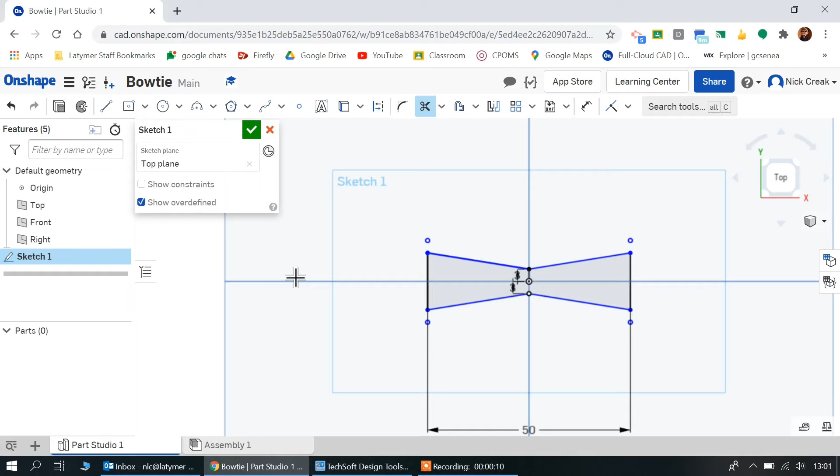When you're drawing on Onshape for a laser cut part, you want to draw in one sketch only and in 2 dimensions only. You then tick your sketch once you're finished, so you can see, for example here, I've got a bow tie.

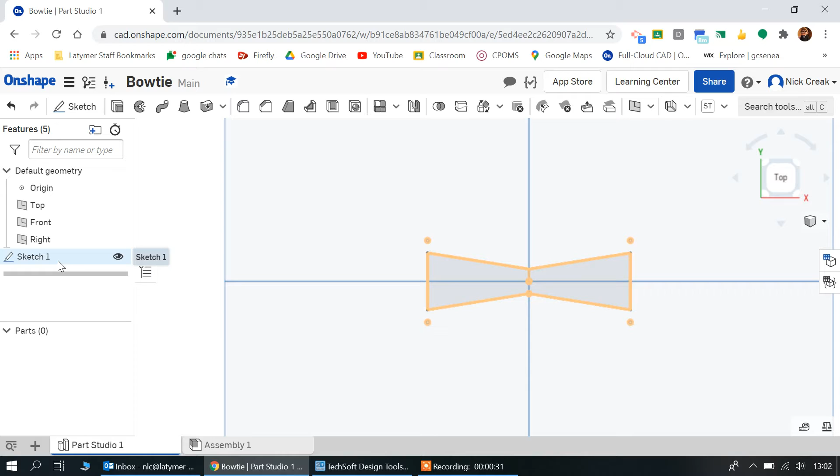I'm happy with it. I'm going to right click on Sketch 1, go export as DXF or DWG. You will most likely have DWG automatically selected if you haven't done this before, so make sure you have DXF. You change the name here to your initials or what you want to call it, as long as it's recognizable, and make sure this box here is clicked, then click export.

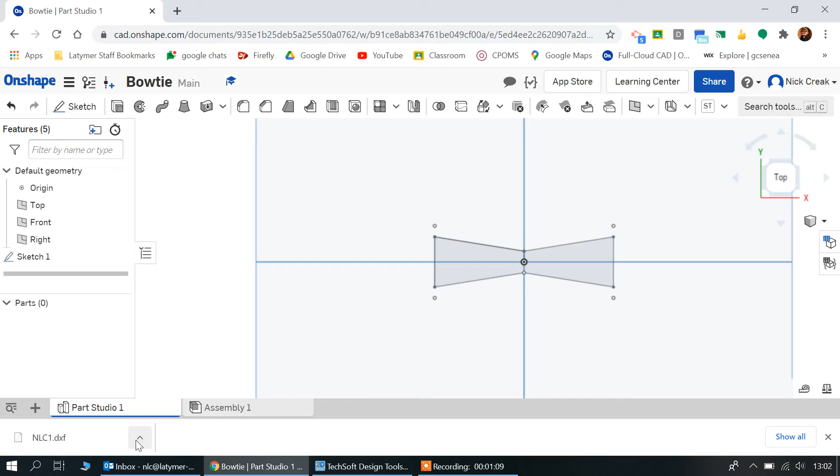Now from here, because of the permissions that you have on the computer, you need to click show in folder. I'm just going to quickly search for NLC1, and there's my part there. What you're going to do is drag that into a folder that you have access to. For example, I've got pictures here.

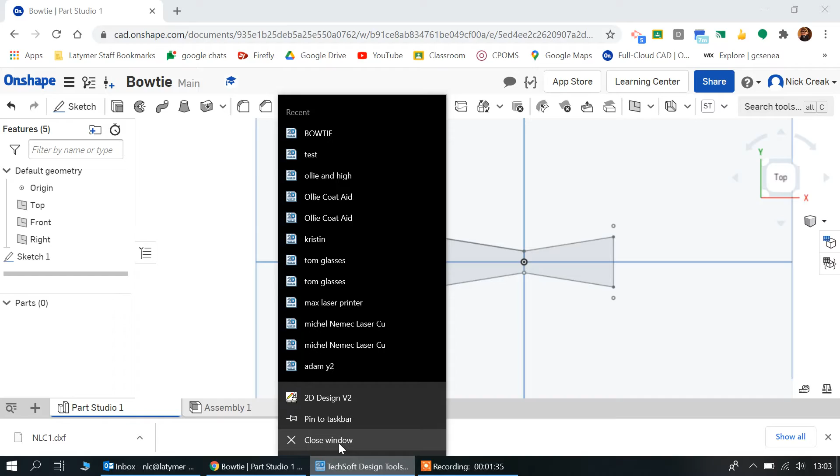I'm then finished with Onshape. What you need to do, if you click search and click 2D, you'll be able to open up 2D Design. It's best to do this on either upstairs on the green mezzanine or in the blue workshop, because those computers have all the programs that you need.

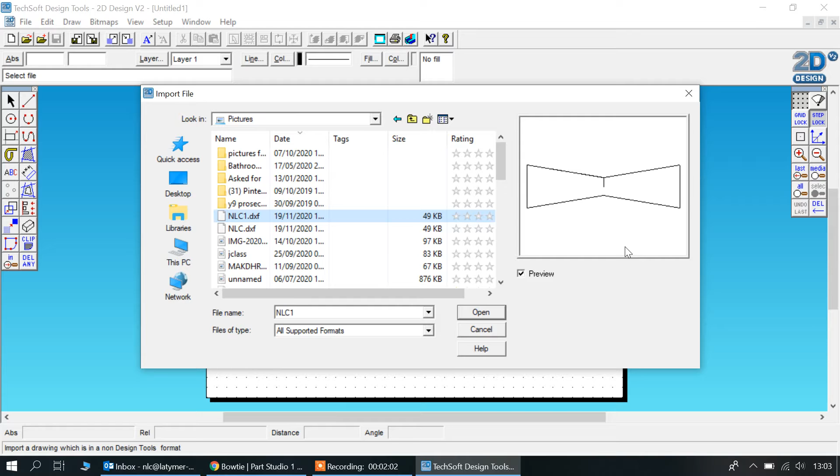You're then going to go File, Import, and this is where having it in a folder that you knew where it was is useful, because I can see it's there and I can see my parts. I'm going to double click. When this dialog box comes up, you just want to make sure you select millimeters, and as long as you want it at a 1:1 scale, you leave the scale at 100% and click OK.

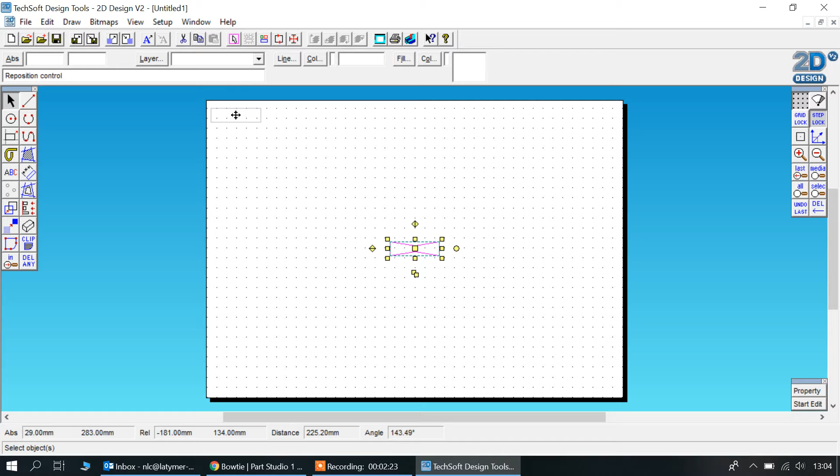We're then going to move this part while we've got it selected, and put it near the top left, and we're going to talk about the size we have here in a second, but for the laser cutter we generally want it top left.

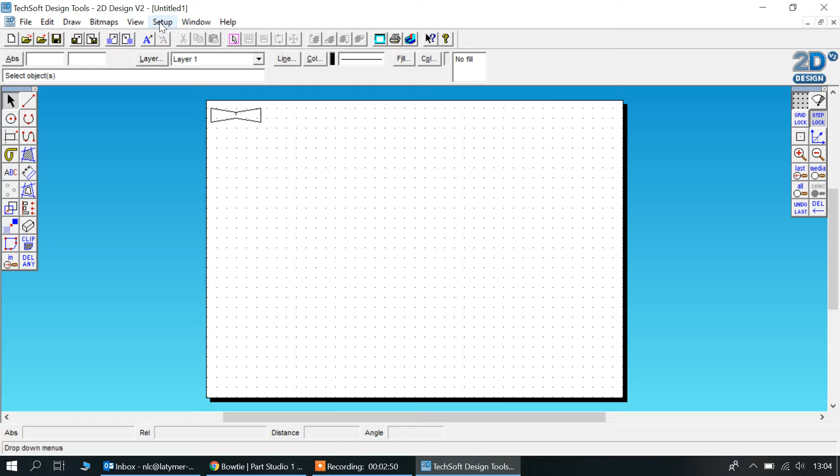Now the bed size on the upstairs blue workshop laser cutter is 800mm by 400mm, but you want to think about what size material you're putting in. Most of the material is 600 by 300mm, so if we go Setup, Drawing, Layout, User Defined, and set this at 600 by 300, 600 by 300, that will give us the white space as the same size as most of the material.

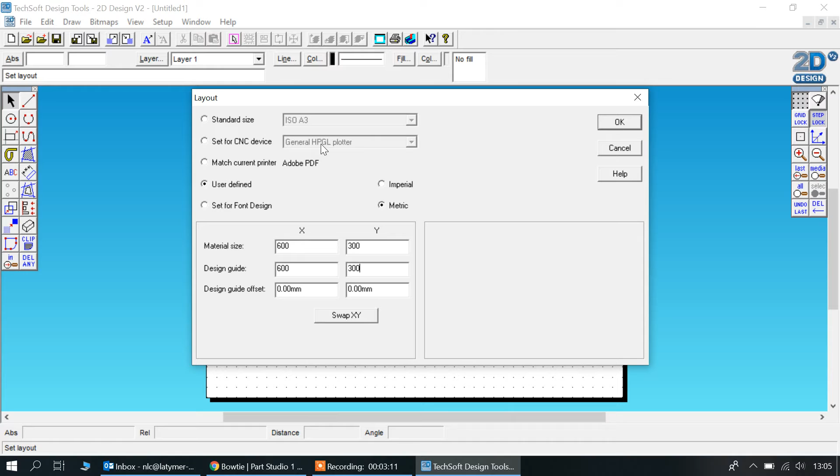If you're on cardboard, that's quite often A3 or A4, so you can just select those as standard sizes. You can see that is the same size as a piece of laser ply, or you can of course just measure whatever material you're putting in there and set that to size.

If you've got multiple parts, then you want to think about lay planning, so you fit as many different parts in to as small a space as you can, making sure that you've got some room around those parts.

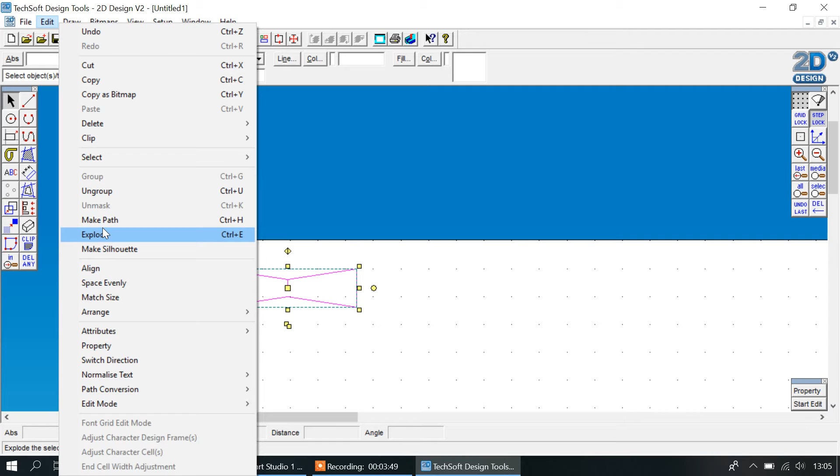So we're going to zoom in on my part now, and there's a couple of things we need to do to this. The first thing is go Edit, Explode, and we're going to explode one level only. That's going to allow us to select individual lines.

The next thing is Onshape will keep every line you draw. So if you've drawn 2 lines, it will have multiple lines underneath. So what you need to do is go round - you saw I held there and went on the next one, so delete part of an object. You click on the line, and if there's nothing underneath, it will disappear, and then you can go Control Z and bring it back.

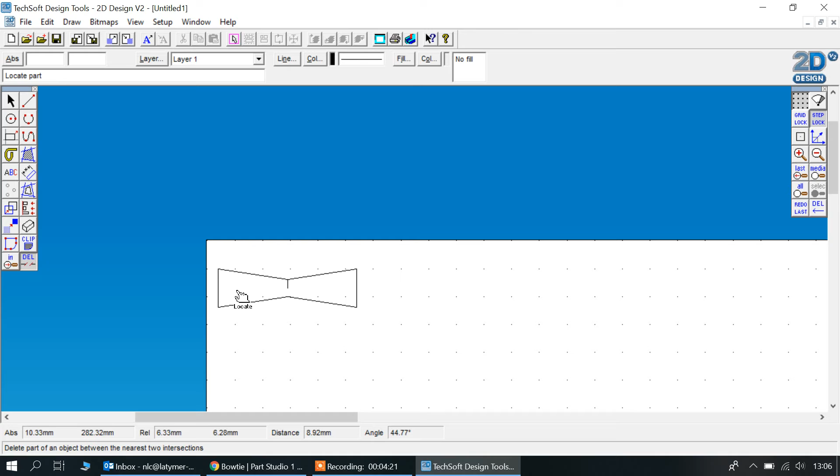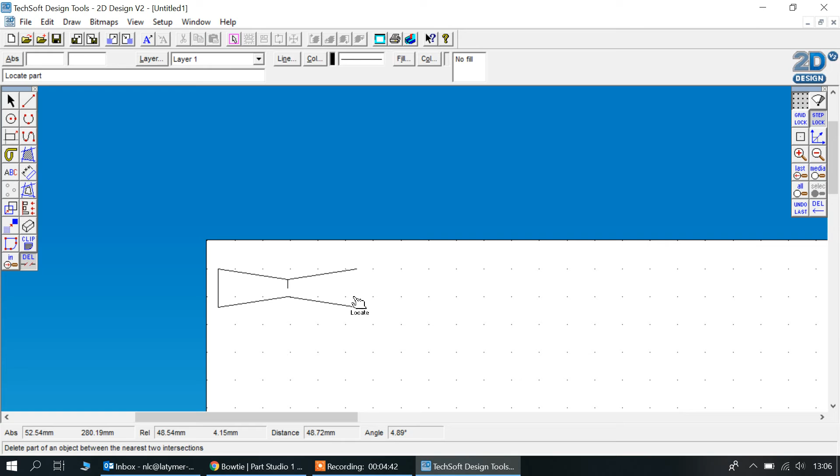So then you move around. There, for example, I clicked and there was another line underneath, so I'm going to click again, and now I've got down to the bottom, so I can Control Z. We need there to be only one line. Again, I clicked there, so I need to click again, Control Z, bring it back, and I'm just going to do this all the way around my shape, making sure there's no lines overlapping.

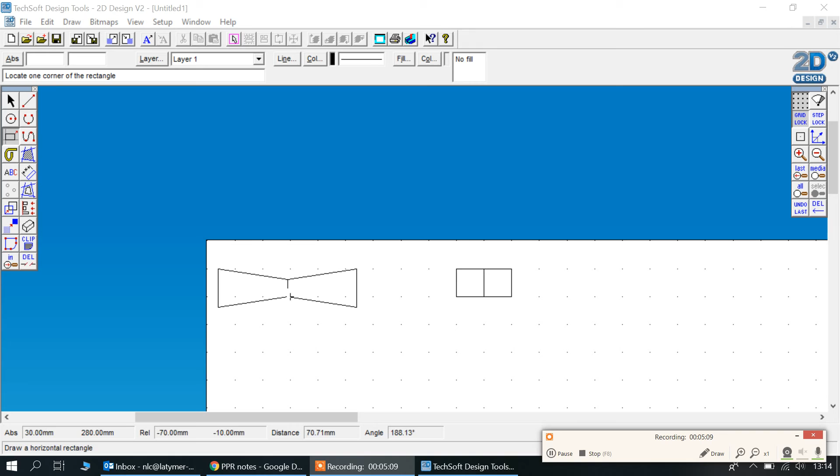If you want to avoid this step, just make sure in Onshape you're really only drawing single lines, and you're never, for example, drawing one box like this and another box like that, because you're going to have 2 lines over the top. As you can see, this would be an example of where the 2 lines would cross because the line's hidden. So you can avoid this by making sure that doesn't happen.

So then we need to change the colours. You've got 2 colours you can use - red for cutting and blue for engraving. So on my bow tie here, I'm going to highlight the lot, make it red, and select my one line there because that's a fold line on this bow tie, and make that blue.

You then need to click File, Save As, and again save this somewhere that you know what it is. So for example there.

It's often good to save it as the material type. So for example, if you want 3mm laser ply, I might change this to NLC 3mm laser ply. This could be acrylic, this could be cardboard, but saving that there will really help your teacher understand what you need to do.

In the next part of this video, I'll go over, once you've got your file onto the computer, how we actually laser cut it.